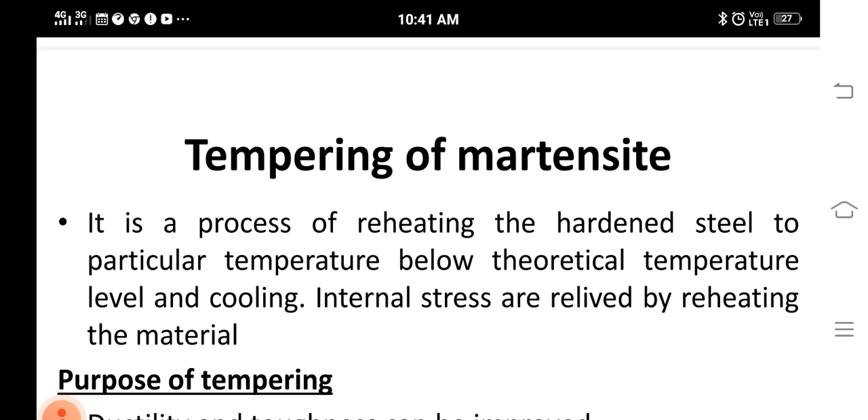Today we are going to discuss tempering. We'll see what is tempering. It is a process of reheating the hardened steel to a particular temperature below the critical temperature level and cooling. This is reheating and cooling of materials, which is hardened steel. Internal stresses are relieved by reheating this material, that is cracks and distortion. Those kinds of imperfections of materials can be removed by using this tempering process.

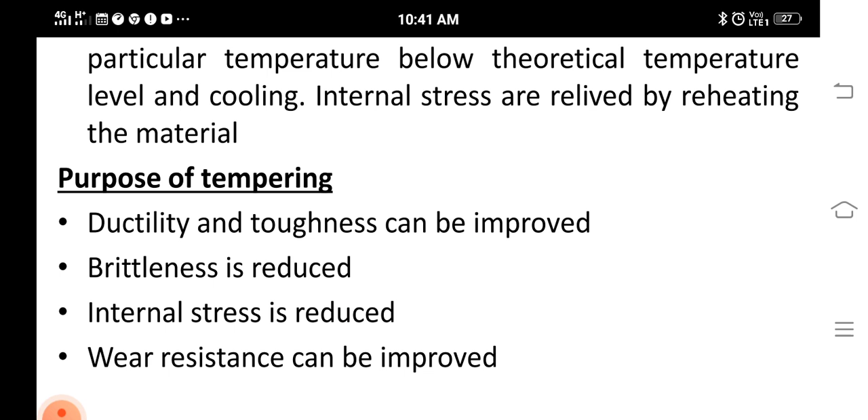What is the purpose of tempering? Ductility and toughness can be improved by this technique. Brittleness can be reduced. Internal stress can be reduced, that is cracks can be removed, and wear resistance can be improved by using this tempering process.

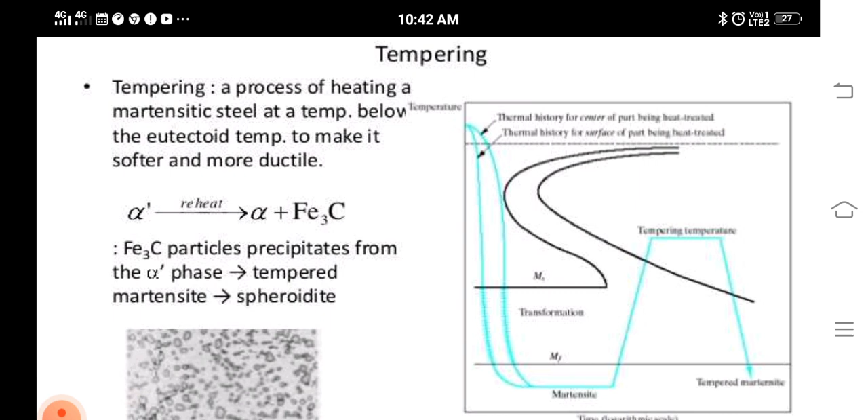Here we can see the tempering process is reheating a martensite steel at a temperature below the eutectoid temperature, that is 727 degrees centigrade, to make it softer as well as more ductile. That is, here alpha dash becomes alpha and Fe3C, that is martensite phase gives the martensite phase without any imperfections with cementite phase. Fe3C particles precipitate from alpha phase and tempered martensite phase.

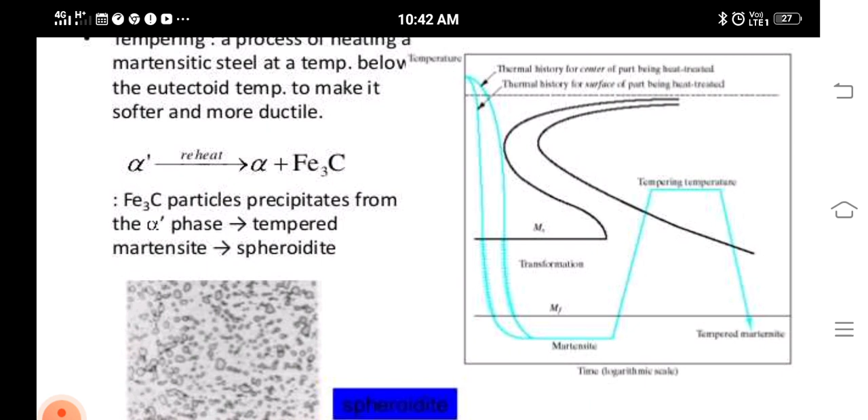Here we can see the microstructure of the martensite phase transformation. Here we can see S curve and C curve. This is the tempering process. By using this tempering process, we can make the material softer and ductile. Here we can see the martensite phase with the tempered martensite and heavily tempered.

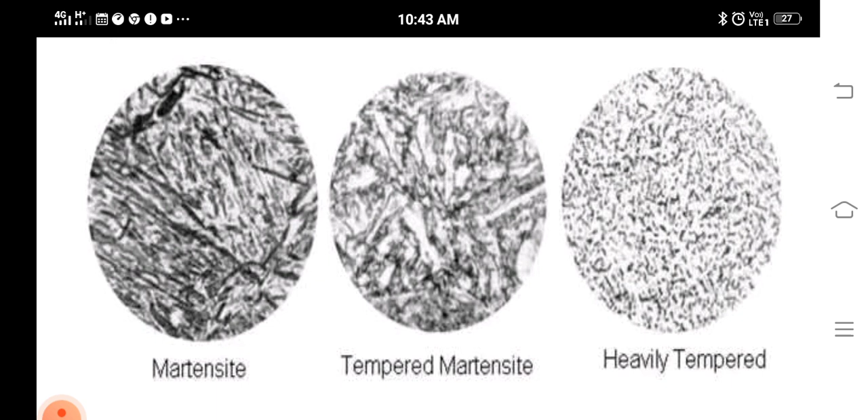In case of martensite, we can see the structure or the morphology as a hardened one. The material is hardened and there is no perfection or no uniformity in the microstructure of the material. But in case of tempered martensite, most of the atoms are becoming softer. In case of heavily tempered, we can see the material is more ductile and softer. The morphology itself shows it is a soft material.

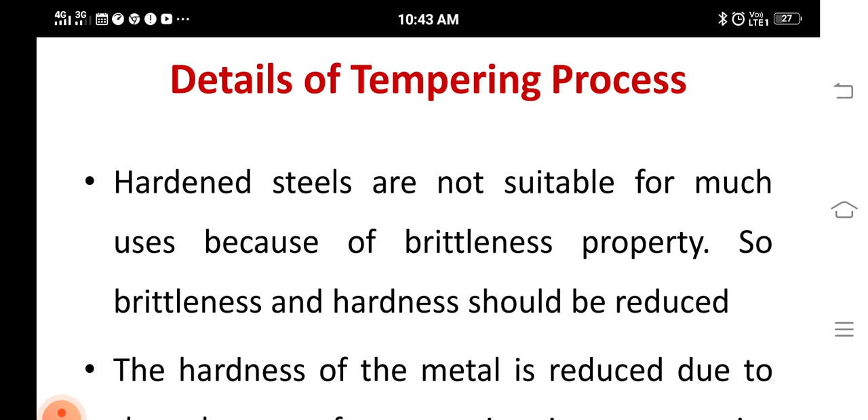The details of tempering process: hardened steels are not suitable for many uses because of brittleness property. If the material is hardened, then the brittleness is high, so the material can break very easily. So this cannot be used for applications. So the brittleness and hardness should be reduced. The hardness of the material is reduced due to the change of martensite phase into cementite during this tempering process. During this tempering process, the hardness of the martensite phase becomes reduced and the cementite phase is appearing.

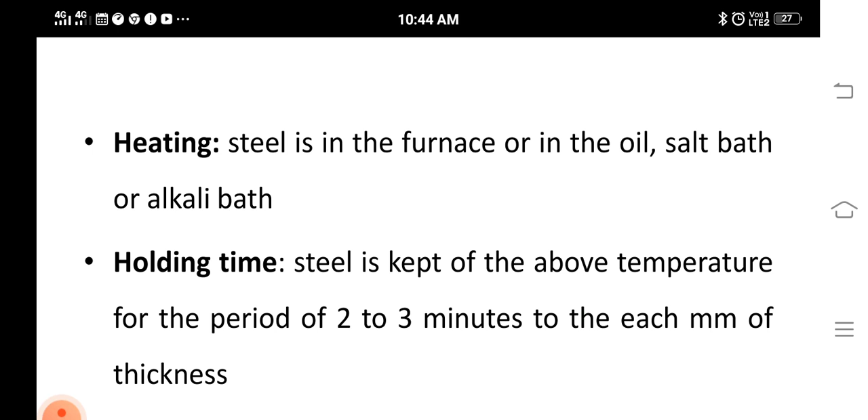Here we can see the factors which are employed in martensite tempering. Heating: steel is in the furnace or in the oil, salt bath or alkali bath, so that the material can be heated. Holding time: steel is kept at the above temperature for a period of 2 to 3 minutes for each mm of thickness. So after heating, the sample is maintained at the same temperature. Then we are going to cool the material, that is rate of cooling. Heated steels are cooled by air and some alloys are immersed in oil bath for cooling. This is also called quenching.

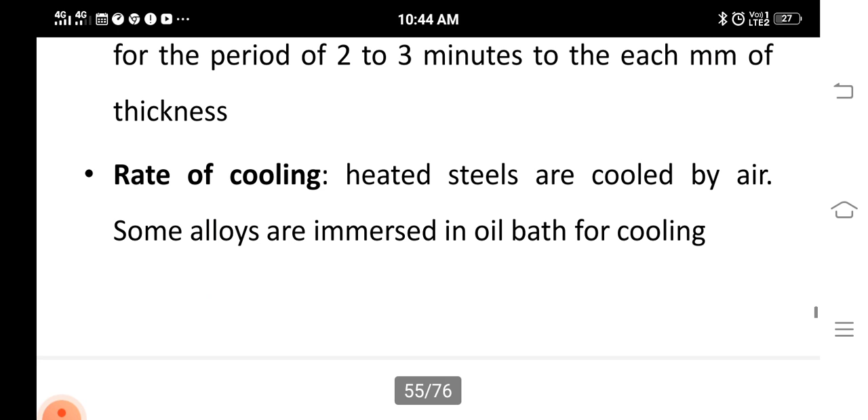Then effect of tempering process. What are the effects of tempering process? Cementite structure is formed when tempering the alloy with martensite structure. Martensite structure becomes cementite structure, that is a fine or soft material, while heating and then cooling, that is the tempering process.

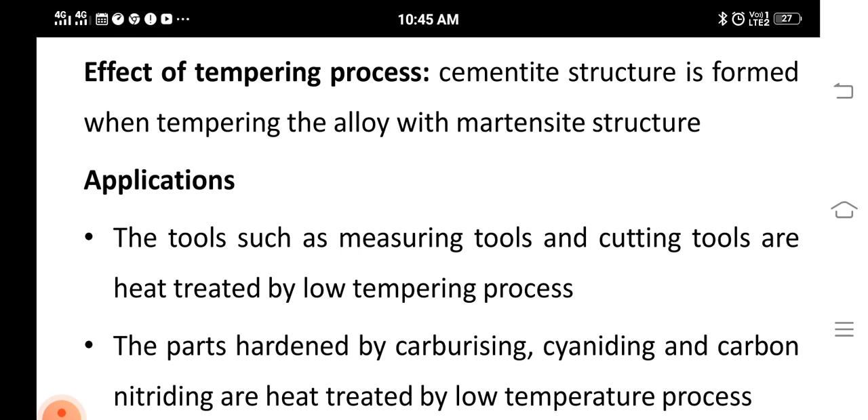What are the applications of tempering process? Tools such as measuring tools and cutting tools are treated by low tempering process. The parts hardened by carburizing, cyaniding and carbonitriding are heat treated by low temperature process. In this, we have seen the tempering process with the mechanisms, the factors which are affecting the tempering process, and the applications of tempering process.